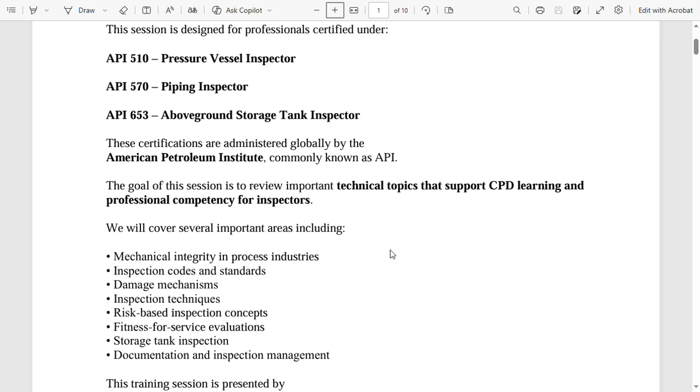We will cover several areas including mechanical integrity in process industries, inspection codes and standards, damage mechanisms, inspection techniques, risk-based inspection concepts, fitness for service evaluations, storage tank inspection, documentation, and inspection management.

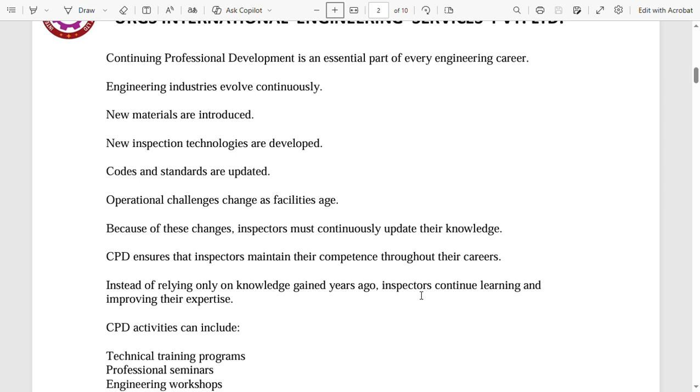Because of these changes, inspectors must continuously update their knowledge. CPD ensures that inspectors maintain their competence throughout their careers. Instead of relying only on knowledge gained years ago, inspectors continue learning and improving their expertise.

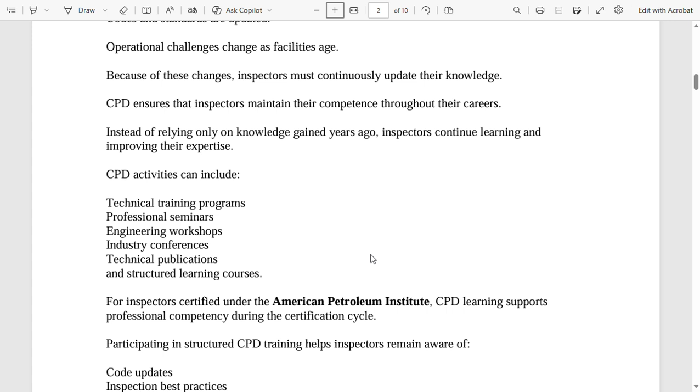CPD activities can include technical training programs, professional seminars, engineering workshops, industry conferences, technical publications, and structured learning courses. For inspectors certified under the American Petroleum Institute, CPD learning supports professional competency during the certification cycle.

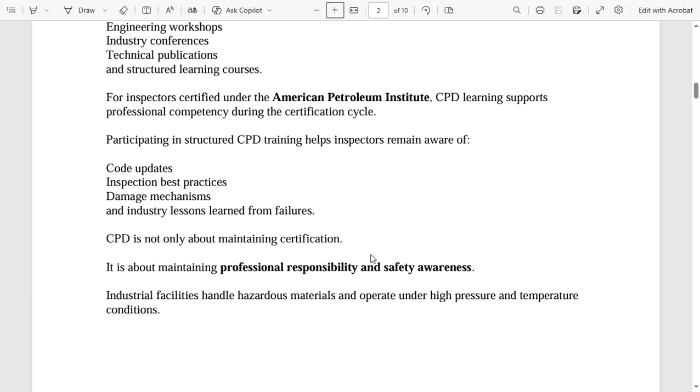Participating in structured CPD training helps inspectors remain aware of code updates, inspection best practices, damage mechanisms, and industry lessons learned from failures. CPD is not only about maintaining certification; it is about maintaining professional responsibility and safety awareness.

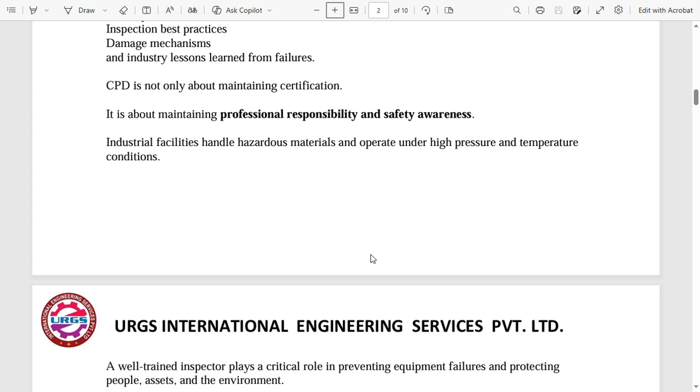Industrial facilities handle hazardous materials and operate under high pressure and temperature conditions. A well-trained inspector plays a critical role in preventing equipment failures and protecting people, assets, and the environment.

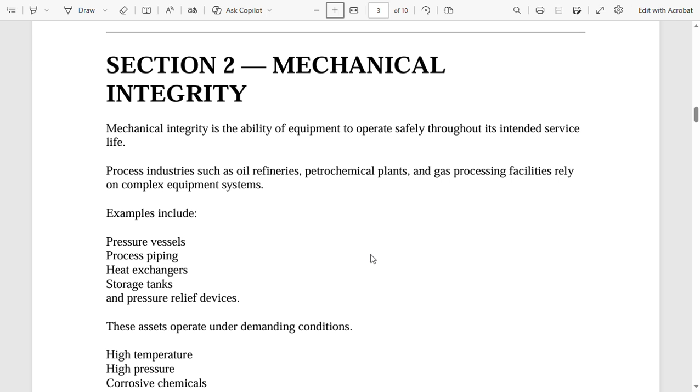Now let us discuss mechanical integrity and why it is important in industrial operations. Mechanical integrity is the ability of equipment to operate safely throughout its intended service life.

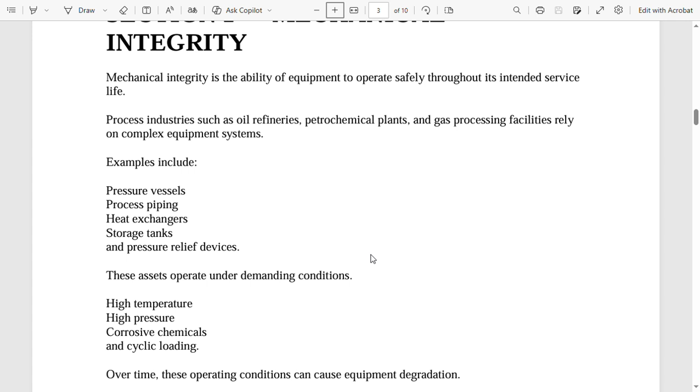Process industries such as oil refineries, petrochemical plants, and gas processing facilities rely on complex equipment systems. Examples include pressure vessels, process piping, heat exchangers, storage tanks, and pressure relief devices. These assets operate under demanding conditions: high temperature, high pressure, corrosive chemicals, and cyclic loading.

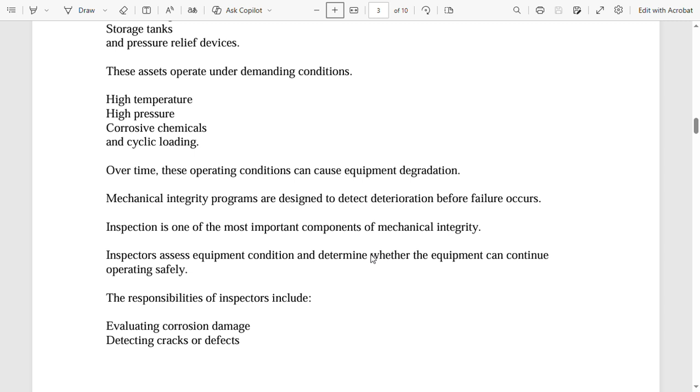Over time, these operating conditions can cause equipment degradation. Mechanical integrity programs are designed to detect deterioration before failure occurs. Inspection is one of the most important components of mechanical integrity.

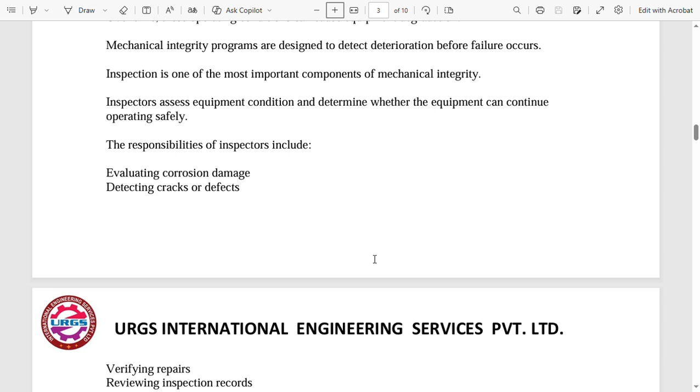Inspectors assess equipment condition and determine whether the equipment can continue operating safely. The responsibilities of inspectors include evaluating corrosion damage, detecting cracks or defects, verifying repairs, reviewing inspection records, and recommending inspection intervals. Inspection decisions directly influence plant safety and reliability.

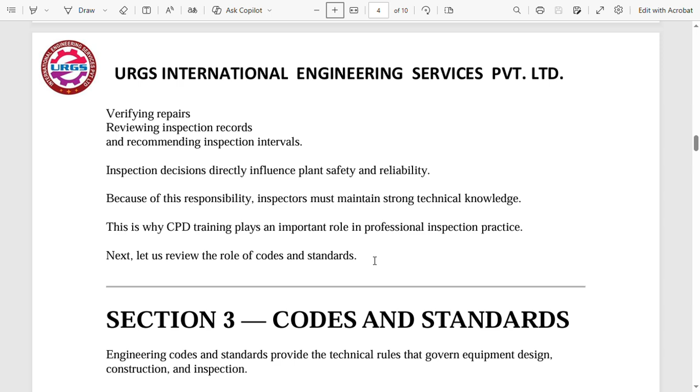Because of this responsibility, inspectors must maintain strong technical knowledge. This is why CPD training plays an important role in professional inspection practice.

Next, let us review the role of codes and standards. Engineering codes and standards provide the technical rules that govern equipment design, construction, and inspection.

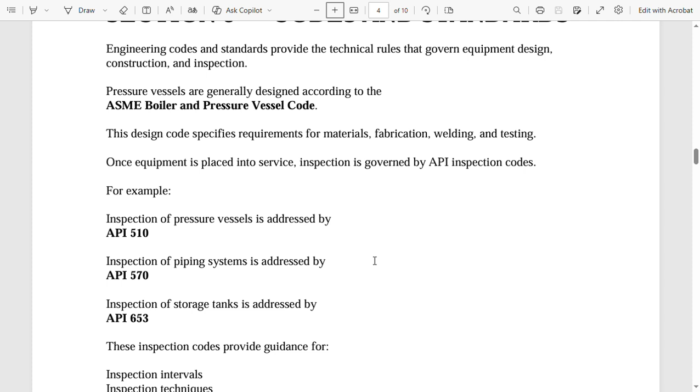Pressure vessels are generally designed according to the ASME Boiler and Pressure Vessel Code. This design code specifies requirements for materials, fabrication, welding, and testing.

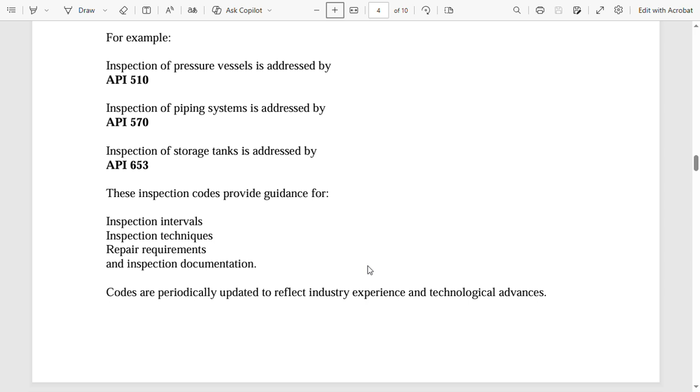Once equipment is placed into service, inspection is governed by API inspection codes. For example, inspection of pressure vessels is addressed by API 510. Inspection of piping systems is addressed by API 570. Inspection of storage tanks is addressed by API 653.

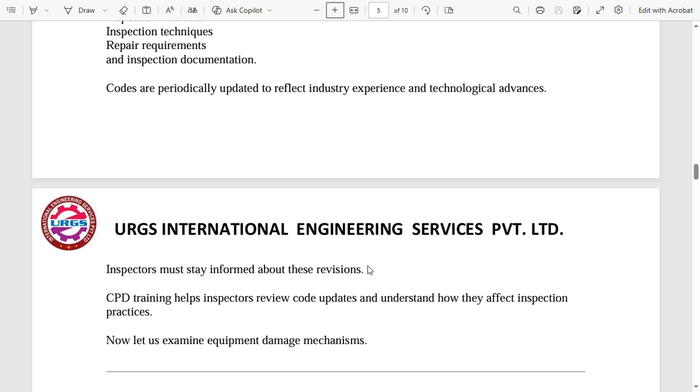These inspection codes provide guidance for inspection intervals, inspection techniques, repair requirements, and inspection documentation. Codes are periodically updated to reflect industry experience and technological advances. Inspectors must stay informed about these revisions. CPD training helps inspectors review code updates and understand how they affect inspection practices.

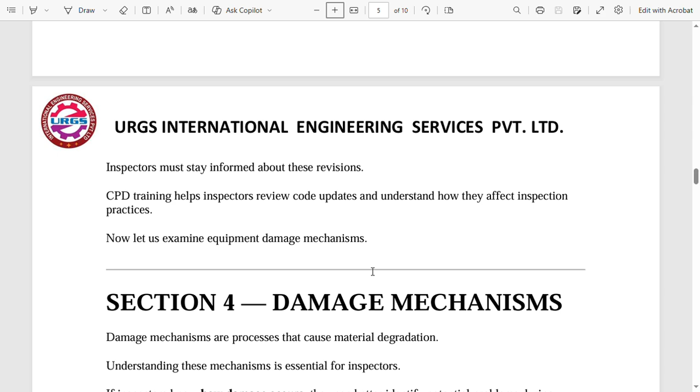Now let us examine equipment damage mechanisms. Damage mechanisms are processes that cause material degradation. Understanding these mechanisms is essential for inspectors. If inspectors know how damage occurs, they can better identify potential problems during inspections.

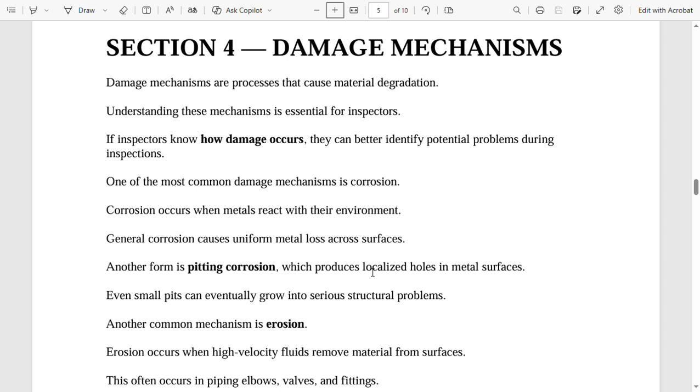One of the most common damage mechanisms is corrosion. Corrosion occurs when metals react with their environment. General corrosion causes uniform metal loss across surfaces. Another form is pitting corrosion, which produces localized holes in metal surfaces.

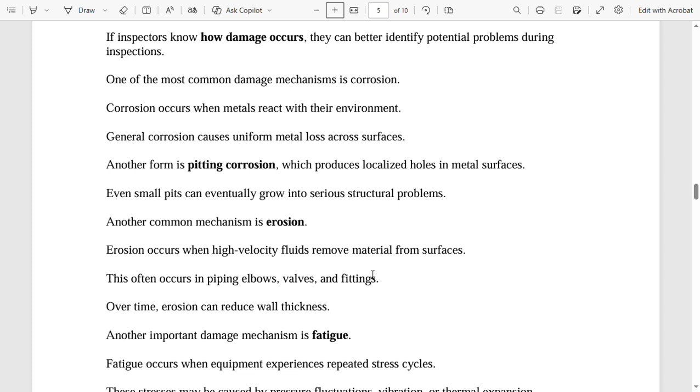Even small pits can eventually grow into serious structural problems. Another common mechanism is erosion. Erosion occurs when high velocity fluids remove material from surfaces. This often occurs in piping elbows, valves, and fittings. Over time, erosion can reduce wall thickness.

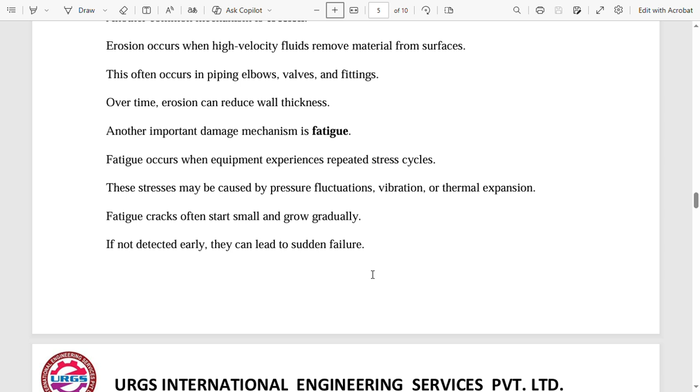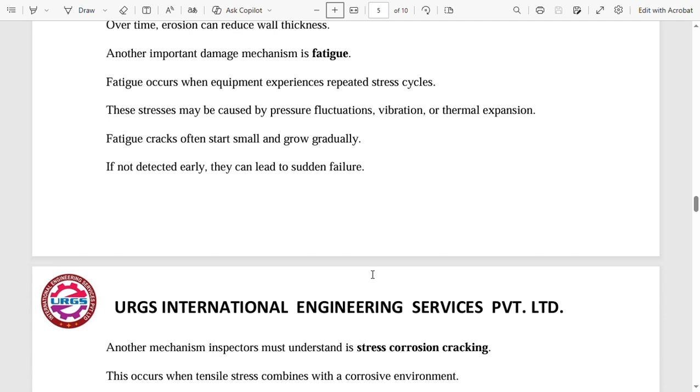Another important damage mechanism is fatigue. Fatigue occurs when equipment experiences repeated stress cycles. These stresses may be caused by pressure fluctuations, vibration, or thermal expansion. Fatigue cracks often start small and grow gradually. If not detected early, they can lead to sudden failure.

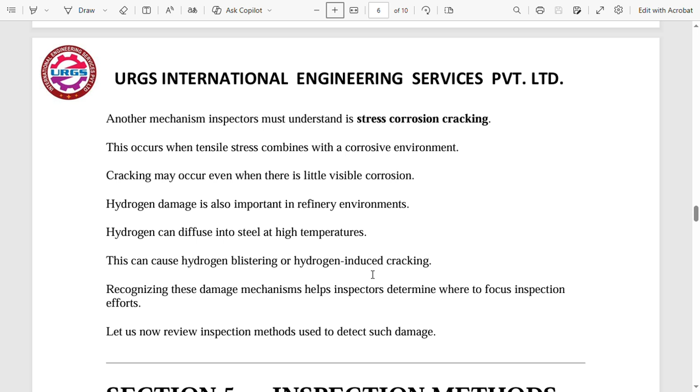Another mechanism inspectors must understand is stress corrosion cracking. This occurs when tensile stress combines with a corrosive environment. Cracking may occur even when there is little visible corrosion.

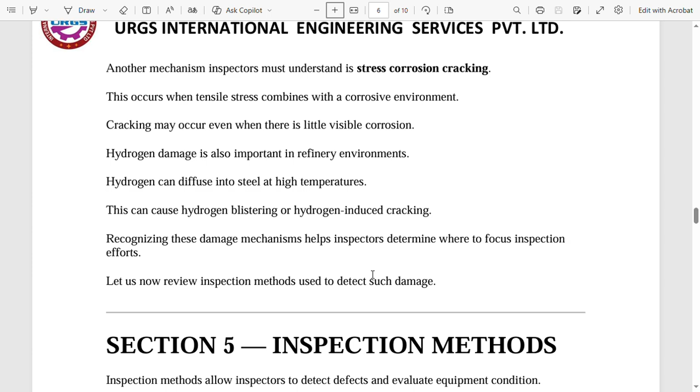Hydrogen damage is also important in refinery environments. Hydrogen can diffuse into steel at high temperatures. This can cause hydrogen blistering or hydrogen induced cracking. Recognizing these damage mechanisms helps inspectors determine where to focus inspection efforts.

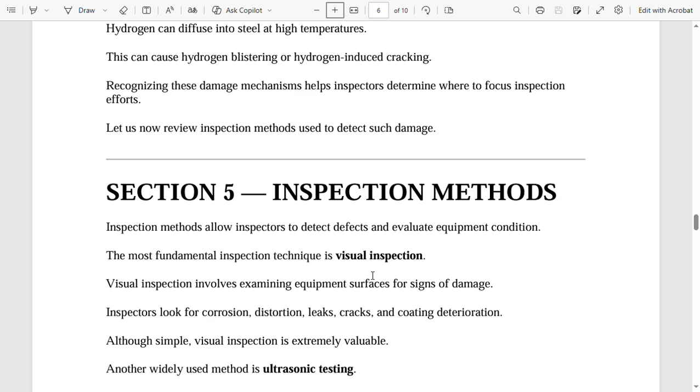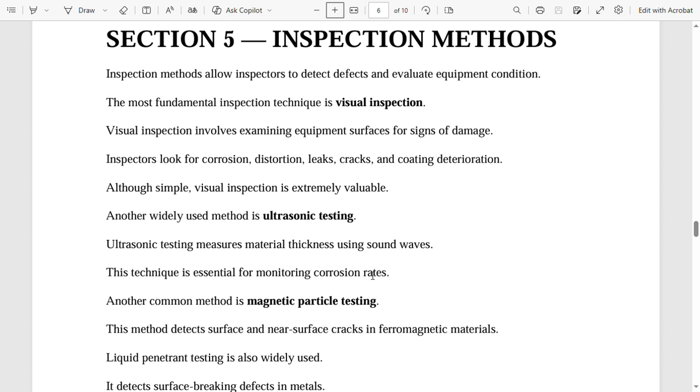Let us now review inspection methods used to detect such damage. Inspection methods allow inspectors to detect defects and evaluate equipment condition. The most fundamental inspection technique is visual inspection. Visual inspection involves examining equipment surfaces for signs of damage. Inspectors look for corrosion, distortion, leaks, cracks, and coating deterioration. Although simple, visual inspection is extremely valuable.

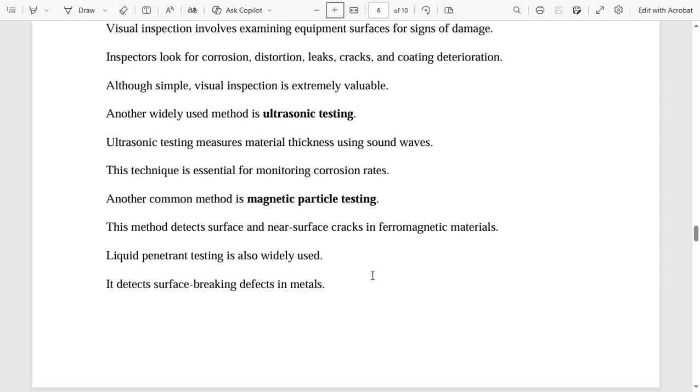Another widely used method is ultrasonic testing. Ultrasonic testing measures material thickness using sound waves. This technique is essential for monitoring corrosion rates. Another common method is magnetic particle testing. This method detects surface and near surface cracks in ferromagnetic materials.

Liquid penetrant testing is also widely used. It detects surface breaking defects in metals. Radiographic testing uses X-rays or gamma rays to examine welds and internal defects. Each inspection method has advantages and limitations. Inspectors must select the appropriate method depending on the equipment and expected damage mechanisms.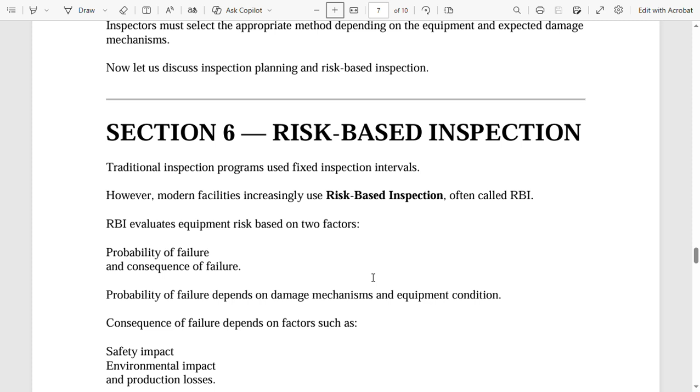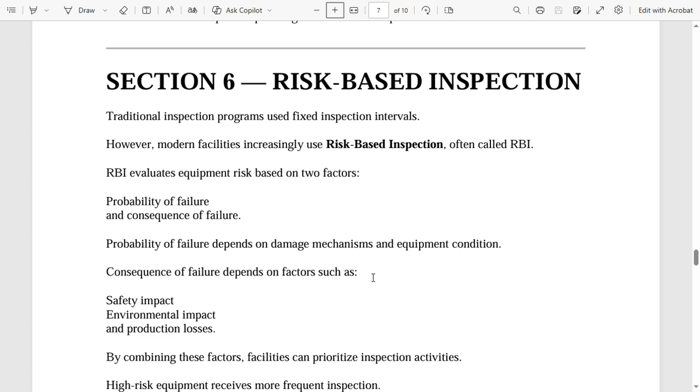Let us discuss inspection planning and risk-based inspection. Traditional inspection programs used fixed inspection intervals. However, modern facilities increasingly use risk-based inspection, often called RBI. RBI evaluates equipment risk based on two factors: probability of failure and consequence of failure. Probability of failure depends on damage mechanisms and equipment condition.

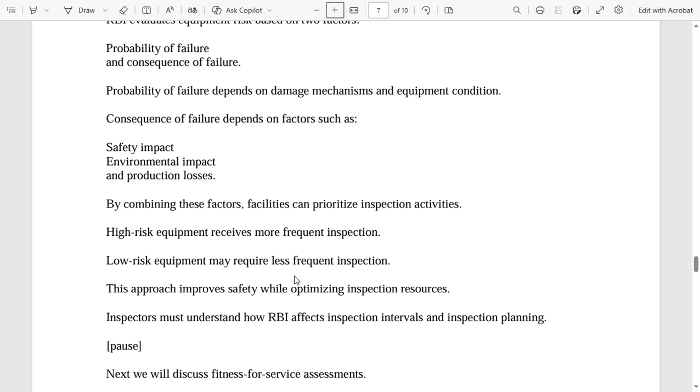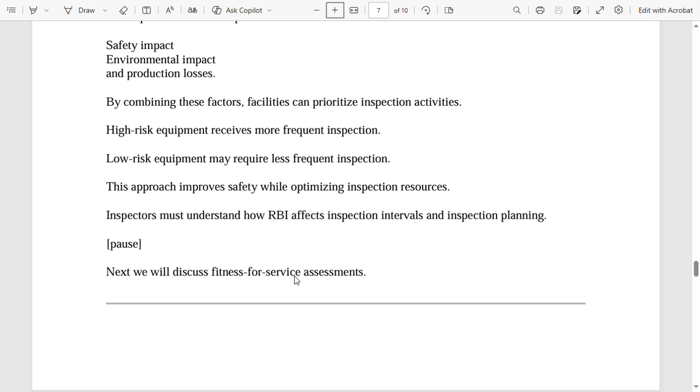Consequence of failure depends on factors such as safety impact, environmental impact, and production losses. By combining these factors, facilities can prioritize inspection activities. High risk equipment receives more frequent inspection. Low risk equipment may require less frequent inspection. This approach improves safety while optimizing inspection resources. Inspectors must understand how RBI affects inspection intervals and inspection planning.

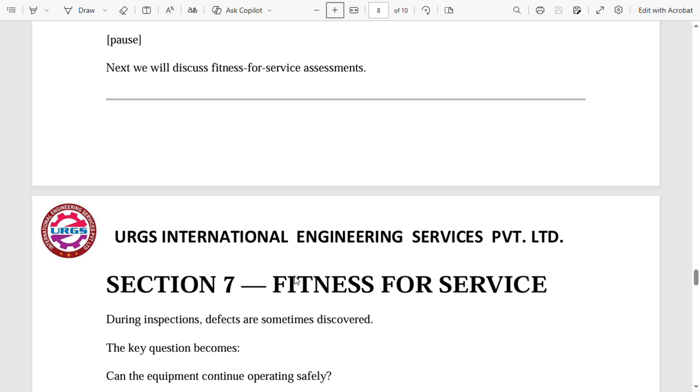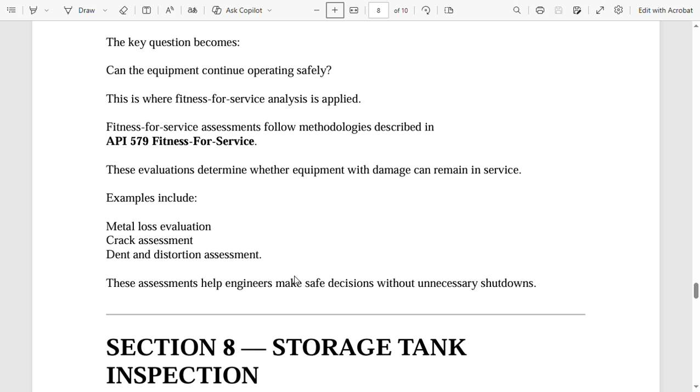Next, we will discuss fitness for service assessments. During inspections, defects are sometimes discovered. The key question becomes: can the equipment continue operating safely? This is where fitness for service analysis is applied. Fitness for service assessments follow methodologies described in API 579 Fitness for Service. These evaluations determine whether equipment with damage can remain in service.

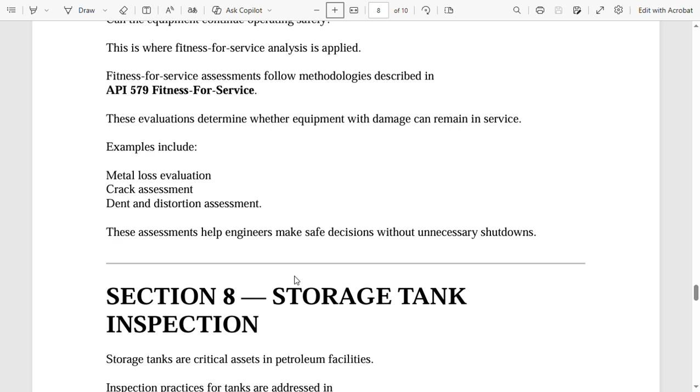Examples include metal loss evaluation, crack assessment, dent and distortion assessment. These assessments help engineers make safe decisions without unnecessary shutdowns.

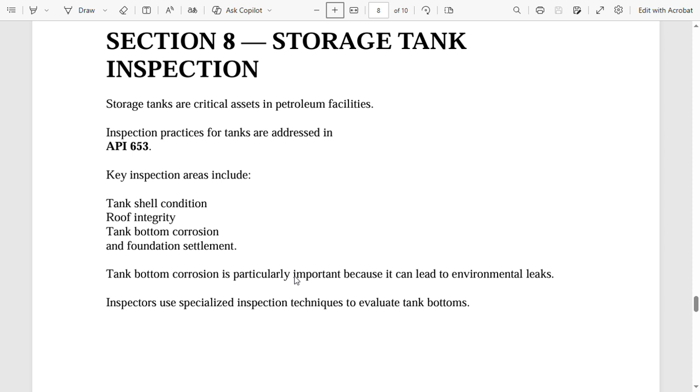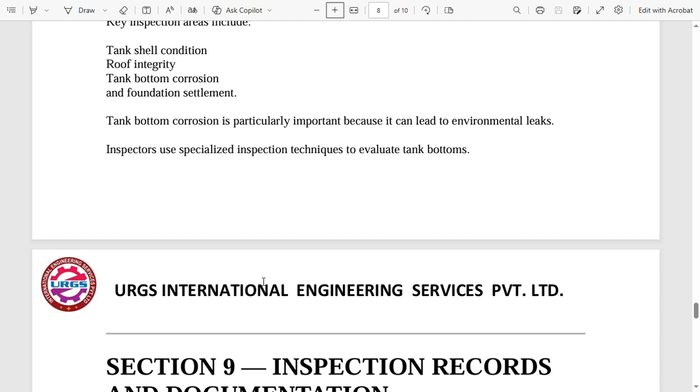The next topic is storage tank inspection. Storage tanks are critical assets in petroleum facilities. Inspection practices for tanks are addressed in API 653. Key inspection areas include tank shell condition, roof integrity, tank bottom corrosion, and foundation settlement. Tank bottom corrosion is particularly important because it can lead to environmental leaks. Inspectors use specialized inspection techniques to evaluate tank bottoms.

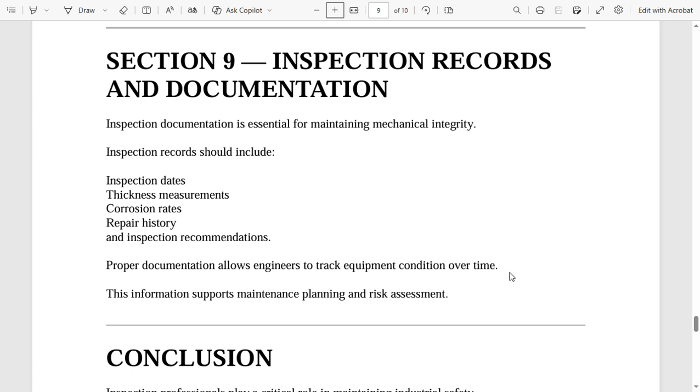The next topic is inspection records and documentation. Inspection documentation is essential for maintaining mechanical integrity. Inspection records should include inspection dates, thickness measurements, corrosion rates, repair history, and inspection recommendations. Proper documentation allows engineers to track equipment condition over time. This information supports maintenance planning and risk assessment.

At last, inspection professionals play a critical role in maintaining industrial safety. Continuous learning ensures inspectors remain competent and informed. CPD training helps inspectors review technical topics, understand code updates, and learn from industry experience.